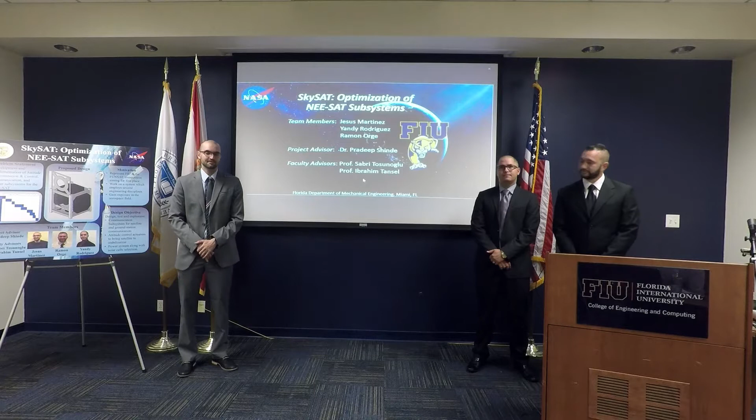The main objective of this project is to develop 3 new subsystems to put into the 1U picosatellite that has been developed in previous years with the NEE club. Our motivation for this is we're aiming for first place in the FunSat competition. We also want FIU to gain more exposure in the aerospace field.

We are very interested in the aerospace industry, and also we want to be able to work in a system that integrates several parts of engineering, not only mechanical but also electrical and computer.

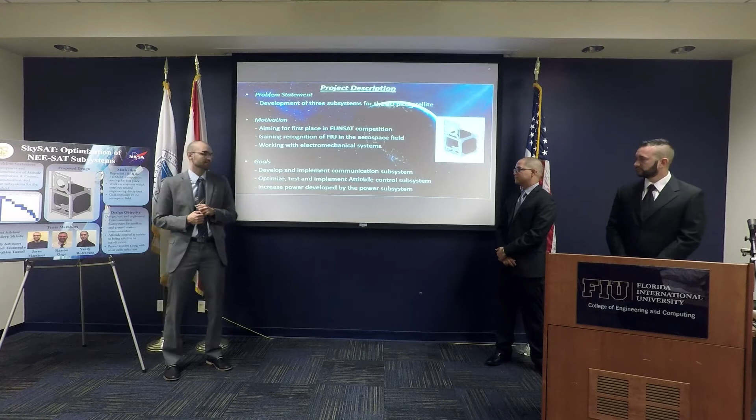The goals are to develop and implement a communication subsystem that's going to allow the satellite to communicate with the ground and vice versa. We also want to optimize, test, and implement an attitude control subsystem that's going to be able to allow the satellite to stabilize while in space. And we want to increase the power developed by the power subsystem by implementing a new subsystem as well.

In order to do this, we had to undergo some literature survey to find more about these picosatellites. We were able to do some research on the several previous launches that have happened and on the schools that have been working on this, different research institutions. California Polytechnic and Stanford were the ones that first did this and developed some standards that we are able to follow in order to make our launch successful.

We also looked at the FunSat competition and tried to analyze what they're looking for and the different constraints that we have, as we said, we're aiming for first place. So we want to make sure that everything is okay. And we looked at the FIU NEE Club previous work on these satellites to try to understand what they've done and what we can optimize with their systems.

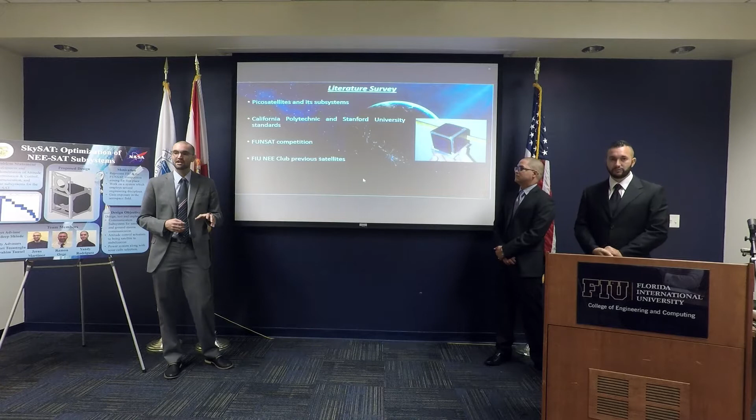These are just a list of some of the related standards that we had to look for. It's very similar to the previous teams. We had to look at the NASA ones. And the American Society of Mechanical Engineers ones are ones that we focus on when we make all of our designs with mechanical parts.

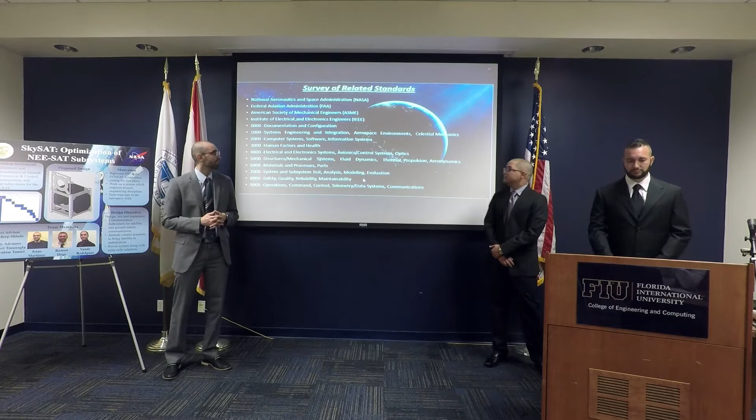Well, some of the objectives of this project are to have a fully working prototype that will comply with all the specifications for the FunSat competition. Also to design, test, and implement a communication system for information transmission between the satellite in space and the ground station. This communication system is of vital importance for the mission success.

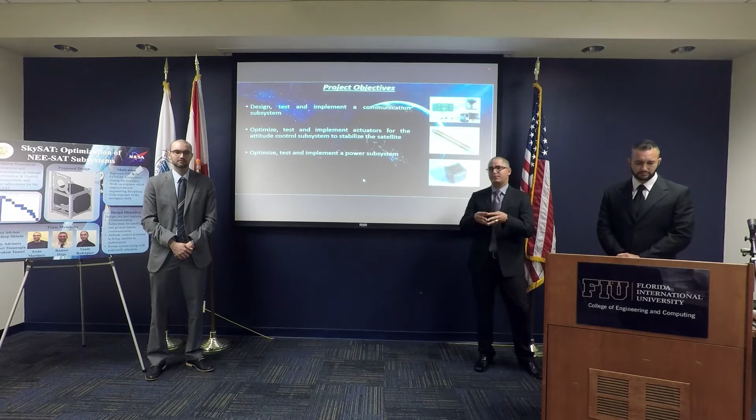Also to optimize, test, and implement the actuator for the attitude control system, that is the one that will bring the satellite to stabilization once it's launched into space. And the power system, that is the one in charge of generating the needed power for the different components inside the satellite.

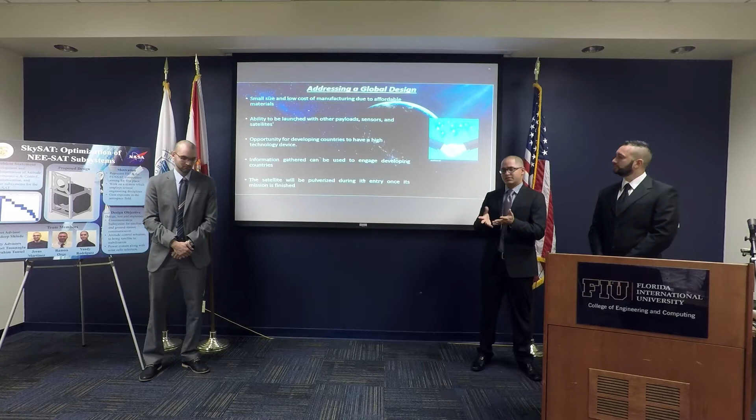Due to the small size and low cost of manufacturing of this satellite, it will be able to be launched into space with other payloads, sensors, and satellites. Also, it will give the opportunity to developing countries to have a high technology device that will gather information, and this information gathered can be used by these developing countries that share common issues to build bridges of cooperation among them.

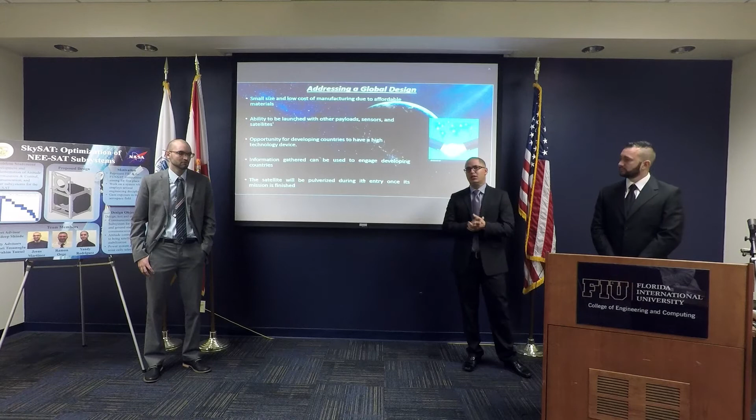And also the satellite will be pulverized during its entry once its mission is finished, so it will leave no debris in space.

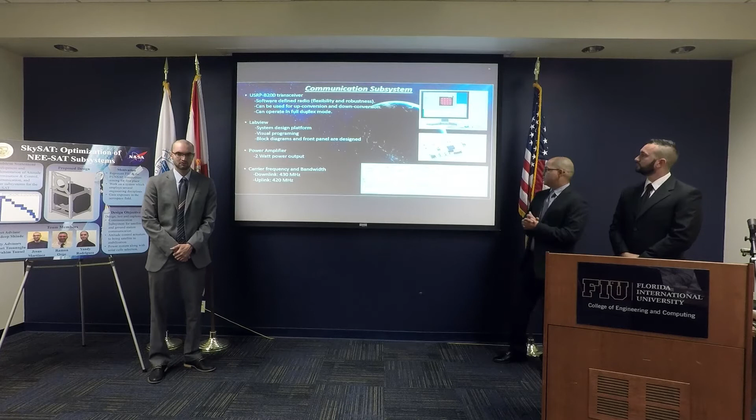Having a duplexer is very useful in this case because with only one device we can do both transmission and reception at the same time. And then from there to the dipole antenna in the satellite. And from the antenna to the Yagi antenna here on the ground station, and then to the duplexer and the USRP. And from here to the computer here on the ground station.

This computer is the one that has the LabVIEW software. That is the one that we use to build all the different protocols for the information reception and transmission. In this case, transmission will be commands back to the satellite that can help stabilize the satellite or set different parameters in the satellite.

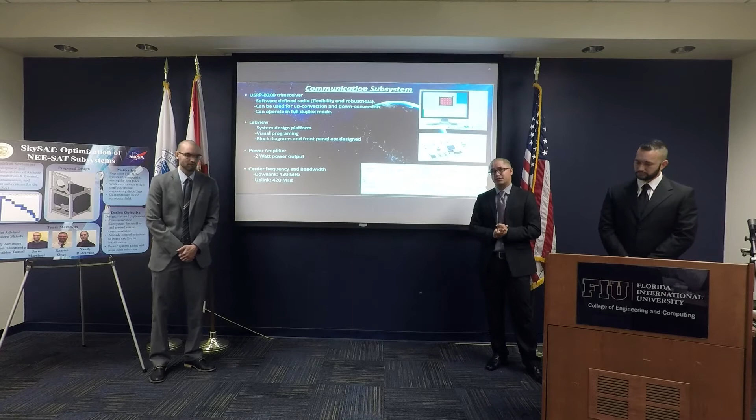So the attitude control subsystem. The attitude control subsystem is the main part of the satellite. Once the satellite is launched into orbit, it's going to be tumbling around. And because our objective is to get weather information and take pictures, we want it to be stabilized so that we can get all that right information.

So when designing this, there are different options. We could have gone with thrusters or magnetorquers. We chose magnetorquers because most thrusters require fuel, and fuel adds weight to our system, and we want to keep the weight under a certain parameter for the FunSat competition. And also fuel runs out. So for our lifespan, we wanted to be able to have the right amount of energy. So we selected magnetorquers.

Magnetorquers, the way they work is we have a ferromagnetic core. It's enveloped in a coil, and as we pass current through the coil, we create an electromagnet. We put one of these on each axis of the satellite, and they will interact with the magnetic field of the Earth and create a torque on the satellite. So depending on the current that we put, we're going to be able to stabilize the satellite on each axis.

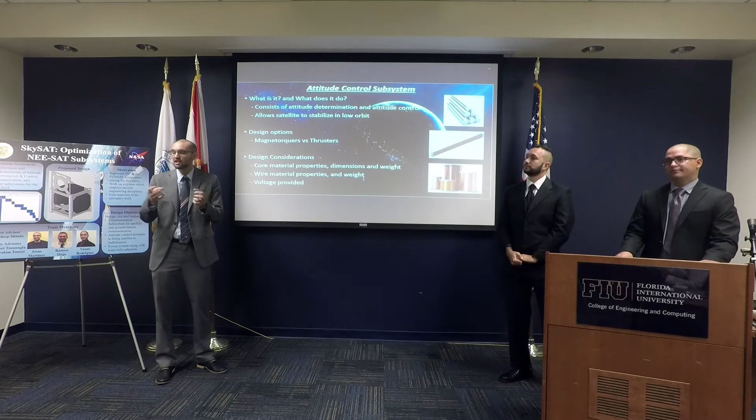So in order for us to design this, there are several things that we need to look for. We need to look for the magnetic core and its properties. We wanted to have a high ferromagnetic ability, the ability for it to be magnetized so that it can produce more torque. We also looked at the wire materials, and we want to find a wire with low resistivity so that more current can be put through it. We have selected copper wire so far, but we're looking at different gauges.

And we also want to look at the voltage provided from the power system, because the more voltage we are able to get, the more current we will be able to develop, and more torque will be developed for the system.

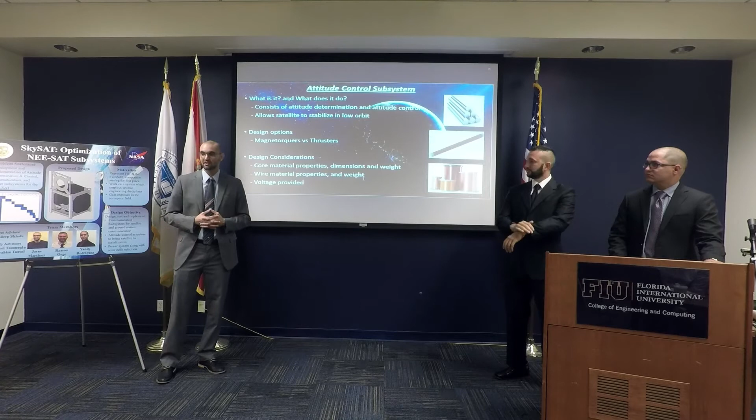We will be implementing a power system that will produce, store, and distribute charge amongst all of the satellite's internal components. We'll be choosing Spectrolab's 29.5% efficient solar cells as the main means of this power conversion. We're going to be placing one 59.65 square centimeter solar cell on each side face of the CubeSat and one on the top. We will not be placing one on the bottom, because that's where we have our payload, such as the thermal sensors and the optical cameras.

Once these solar cells receive radiation, they convert it into electricity, which will then be stored in a lithium-ion polymer battery regulated by a battery management system. From this storage device, it's then distributed amongst different components such as Beagle boards and Arduinos, which will in turn power the subsystems, the attitude control system and the communication subsystem, along with the payloads.

So where exactly is this energy coming from? When this satellite gets sent up into low Earth orbit, there are going to be two main sources of power. One comes from the sun in the form of solar radiation, and the other comes from Earth's albedo, which is the reflectivity of the sun's rays bouncing off the Earth back into space, and from the Earth's own infrared radiation. You see the average value for solar radiation and the other two values for the Earth's power on the screen.

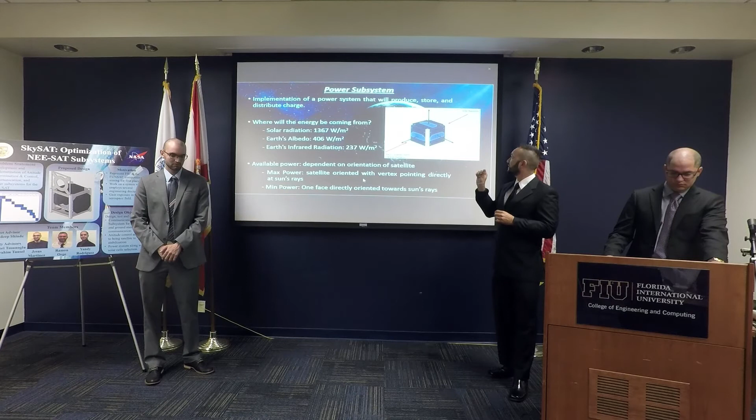The available power is going to be dependent solely on the orientation of the satellite. In our analysis, we found that when any top vertex is pointing directly towards the sun's rays, it will make an equivalent 54.73 degree angle to the normal of the top face and any two side faces of the CubeSat. With this orientation, we'll be able to harness the maximum amount of power for this satellite.

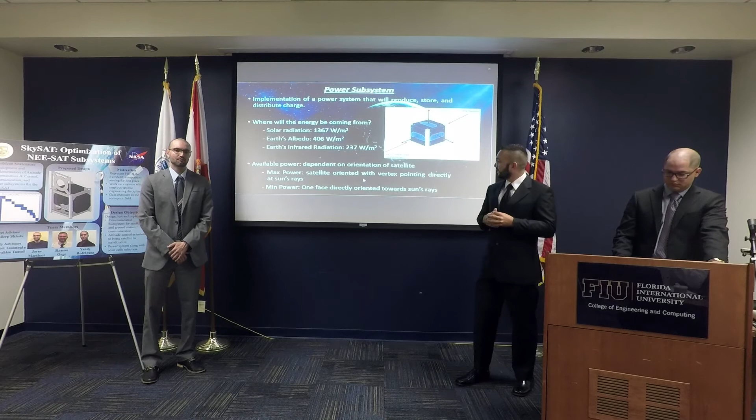We also did analysis on the minimum amount of power that we'll be able to receive. When one face, specifically the top face, is oriented directly towards the sun, that's when we're going to have the minimum amount of power, in which only one cell is influenced by the sun. And when it goes into eclipse, the only form of power available is going to be the Earth's infrared radiation, in the absence of the sun.

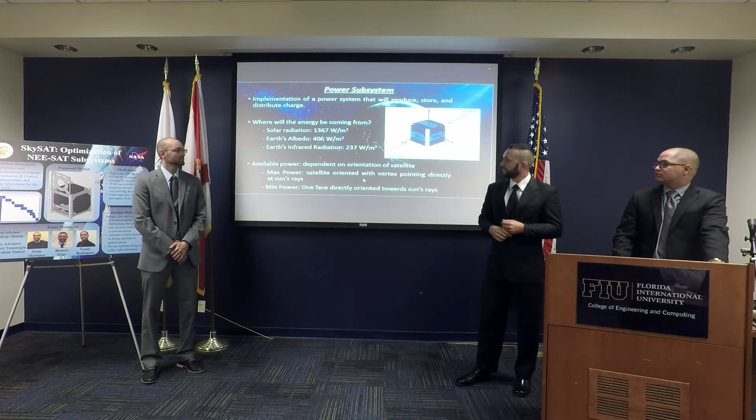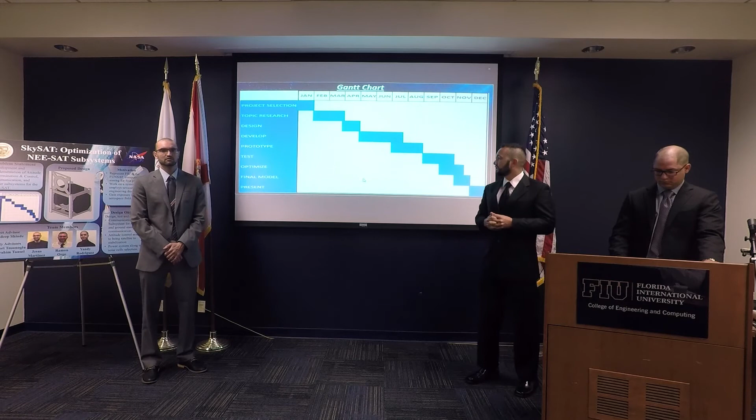So in conclusion, once again, the three subsystems that we will be working on are the communication subsystem, the attitude control system, and a power subsystem. The communication protocols have already been designed. For future work, we'll be connecting all the components and testing them at required parameters.

For the attitude control system, core, wire materials, and dimensions, current, and weight have also been analyzed and chosen. For future work, we will now be doing simulations, and testing on these simulations will be performed. And finally, for the power subsystem, we have the solar cells selected already. We have attained the maximum and the minimum amount of power for this system. And for the future work, we will be developing and testing will also be performed.

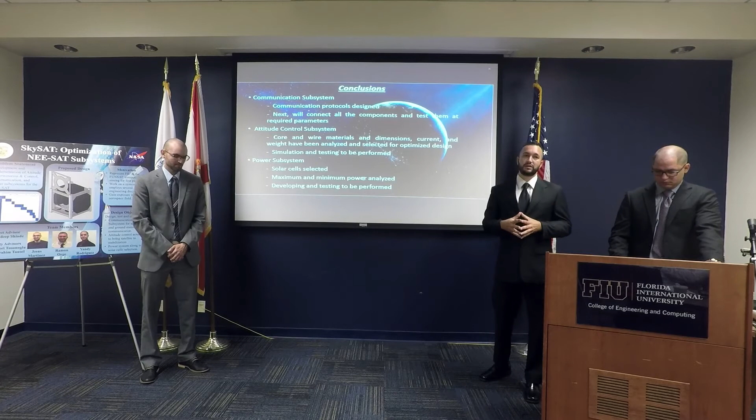I'd like to thank you for our presentation, and we leave the floor open to any questions.

Yes, it's going to have several sensors that are going to give us the information that we need to see where we are, and then we send those sensors to the beacon board, and then from there we have the output that is the current. We send it to each magnetorquer, and then we're able to stabilize it depending on where we want it to be.

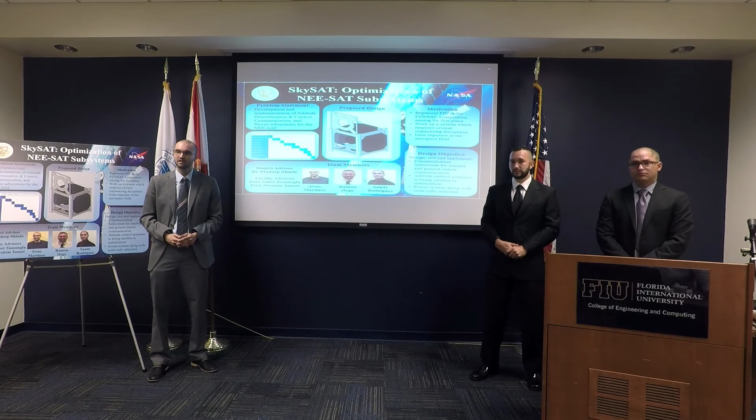You made the statement that the system needed to pulverize itself with no debris left in space on re-entry. Is that truly a requirement? And if so, what are you going to do in order to ensure that you have nothing left when this thing comes through re-entry? Actually, the satellite will be very small, so once it goes into the atmosphere, it will just burn out.

So yeah, but you've got many different types of materials in there. And some of them are high melting temperature materials. For example, maybe ceramics in some of those electronic devices. Is that going to get burned up in space? So is that a requirement? Is it really? No. Probably not a requirement. No, it's not a requirement. So I wouldn't talk about things that weren't requirements. Let me go there. Okay.